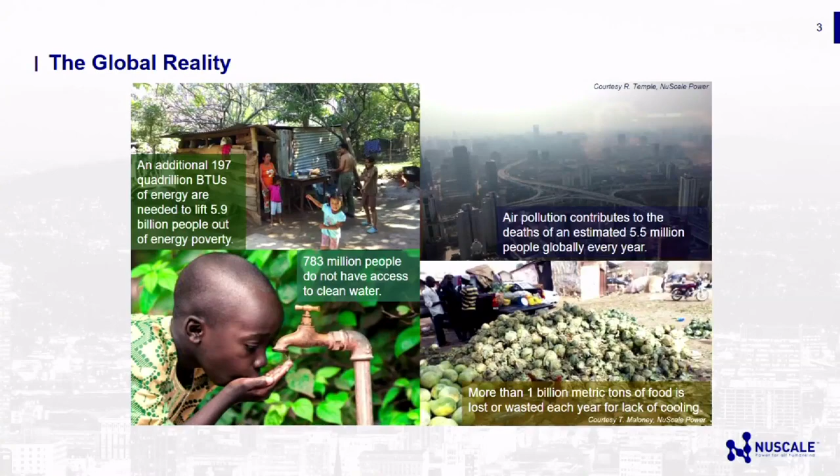And here's one I really wasn't aware of until we started researching it. About 1 billion metric tons of food is lost or wasted each year because they don't have the electricity to take it from the farm to the market. And so it gets spoiled. So that's the world we live in.

Now, it's not all doom and gloom, because if you look back in the 1960s, the poverty rate has been cut in half since 1960. So there is progress being made, but we have a real opportunity to make a change in the world. So the United Nations has their Millennium Development Goals, and they list them in terms of education, health, environment, sustainability, child mortality reduction.

And one of the conclusions from the United Nations was that without access to modern forms of energy, it's highly unlikely that any of these objectives could be met. So energy plays an important role in moving folks from poverty to a sustainable, healthy life.

So this is kind of a busy chart, and I brought this huge laser. Yeah, that's what I'm talking about. I got this great laser here so I can illustrate this. So if you look at the chart here, I was going to step out a little ways.

This vertical axis is called the Human Development Index. That index captures a couple of different factors: health, education, and income. So it's basically the quality of life on this vertical axis. Then on the horizontal axis, this is the total primary energy demand in gigajoules per year per person. This is how much energy is being consumed in these different countries, per year per person. Okay, this was the demand curve.

So what they found was that there's this correlation between human development and the amount of energy that you use. And it does make sense when you think about it. Right now the US is at 330 gigajoules per year per capita, per person, and the HDI is 0.94. Okay, so that gives you kind of a sense.

You can see on this little smaller chart here, here's the USA over here, and you can see these other countries all along this curve. And this 0.8 is kind of a transition where you'd like people to be above that number. So I started thinking, I wonder what the US was like 150 years ago. I wonder if this correlation is correct, and if it's truly time independent, which there's a lot of work that needs to be done to look at that.

Then I looked up the energy consumption rate back in the 1860s, and in the U.S. we were about 90 gigajoules per year per person. So using this curve, that would put us around 0.75, and 80% of that energy usage was burning wood. So in the 1860s, the primary source of energy was burning wood. 20% was coal, and there were really small fractions of petroleum just starting to be used and some natural gas. But the majority really was burning wood.

And so we went basically from this point all the way over here, and to me that was really encouraging. It took a long time. As the other forms of energy were being introduced, electricity in particular, the large use of coal, it did help move our country from one end of the curve to the other to give us a standard of living that we can enjoy today.

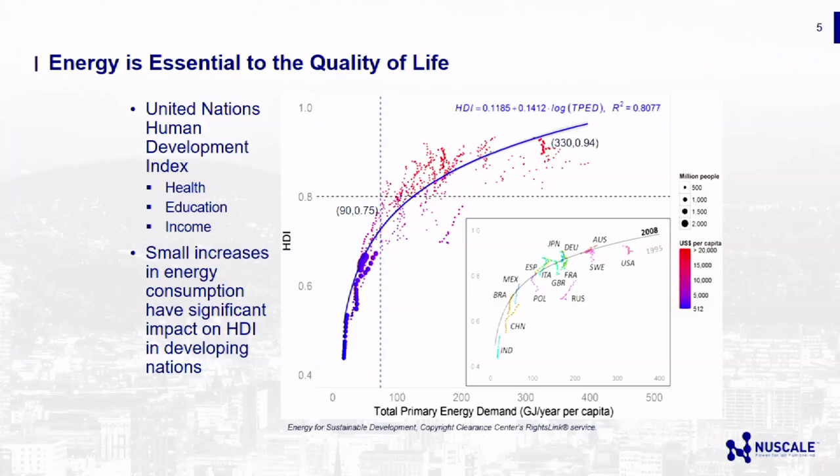It also tells me that if you look at this part of the curve, it's fairly steep. And so what that means to me is that small changes in energy per capita could really move this line up quicker. So developing nations, if you look at where we were back in the 1860s, that's equivalent to where Brazil and Mexico are today. If you look down here, this is India, China. So things are changing.

But small changes in energy could really have a big impact. And there's lots of reasons for that. It's kind of a multiplicative effect. You have energy availability, now all of a sudden you've got clean water, you have light, you have energy for your homes, you have more jobs, and it really accelerates very quickly on that end of the curve.

So this curve to me was very encouraging, but there's also the big challenge. How do we bring almost 6 billion people out of energy poverty in a carbon-constrained world? So sure, when you can use all the coal and wood that you want and emit as much CO2 as you want, you can move along that curve. But how do you do it if there's a carbon constraint? So that's kind of what I'll be focusing on now.

So innovation. OSU is really world-class in terms of its energy research. And it's really kind of an all-of-the-above strategy where we're looking at all different types of energy: wind, wave, and of course nuclear energy, solar cells with photovoltaics, biofuel production, low temperature combustion studies, nanofluids, you name it, the university is researching it.

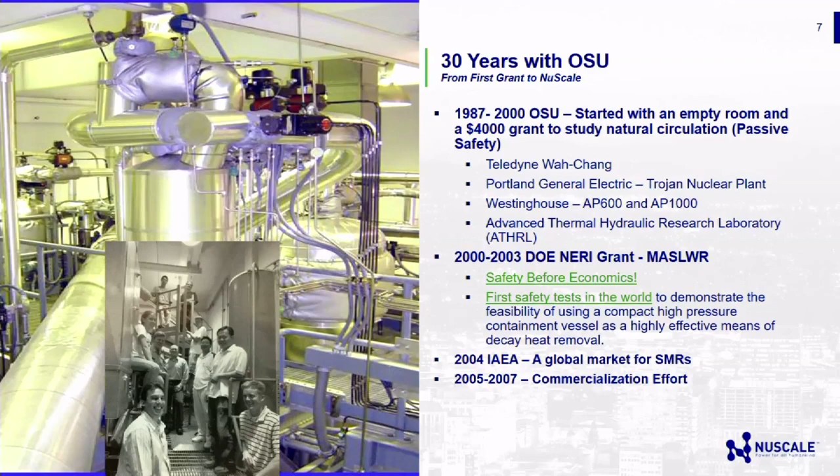In 2000, I had pretty much finished the work on AP600 and AP1000 with the help of my colleagues in the department. Got a grant from the Department of Energy. And it was called the Nuclear Energy Research Initiative. And they funded a project which we called the Multi-Application Small Light Water Reactor, MASLWR. Yeah, it doesn't roll off the tongue real easy. But the idea was that we would come up with a concept for a very small reactor that could be built in the factory, could be shipped to a location, and then it could be operated for 8 to 10 years, and then at the end of that time, you'd actually replace it with another one. So it's kind of like a battery concept.

And because of my background with the Nuclear Regulatory Commission, my perspective was always from safety. I had a safety mindset ingrained in me from the 10 years I worked for the Nuclear Regulatory Commission. So for us, it was safety before the economics. We didn't even look at the economics of this thing. We just said, let's run a test and see how safe it is. And so in 2003, we ran the first test in the world to demonstrate the feasibility of using a small reactor inside of a small containment immersed in water. And it was a spectacular success. So in 2003, that data was available, and it demonstrated a new level of safety that hadn't been seen before.

So when that was done, of course, what's typically done is that you finish your work on a project, you publish a paper, and then you go to the next project. So I was fortunate in 2004 to spend a year in Vienna with the IAEA, the International Atomic Energy Agency. So they work closely with the United Nations. And what I learned while I was there in talking to the delegates from the different member states was that there was a tremendous interest in small reactors. In particular, their concern was that, well, we need power, but we can't really afford the large 1,000-megawatt plants. They're very expensive. And also, we don't have the grid to support 1,000 megawatts. So they were looking for smaller scale power.

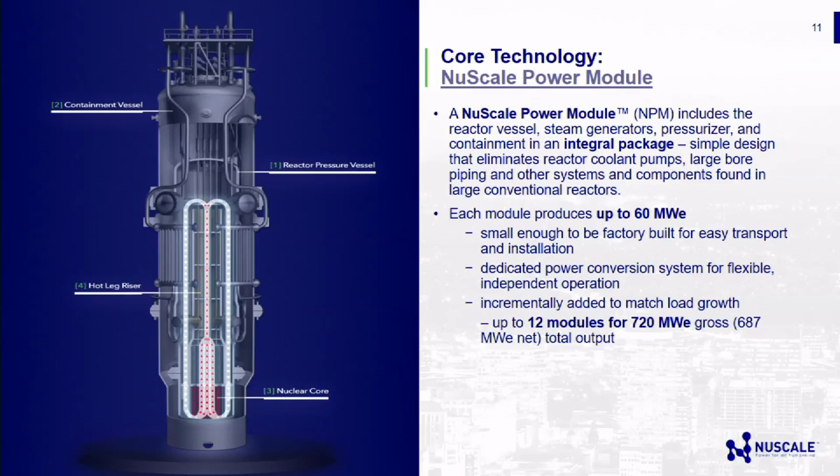Okay, so now you will all become nuclear engineers. So I'm going to talk a little bit about the technology, because I keep talking about these small modular reactors. It would be nice to know a little bit about what I mean by that. So what we're doing is we're commercializing SMRs, small modular reactors. And it's really an integral package which contains the reactor vessel, the containment, all submerged in a pool below ground. And that's kind of the whole technology.

Each module will produce about 60 megawatts electric. And our first plant, for the first customer, they're looking at anywhere between 10 and 12 modules, up to 720 megawatts electric. What they like about our technology is that it can add modules as modules are needed, so you don't have to fill out the entire plant up front, so it saves them in terms of cost. And that flexibility that it can actually fit on a retired coal-fired plant site in terms of the footprint.

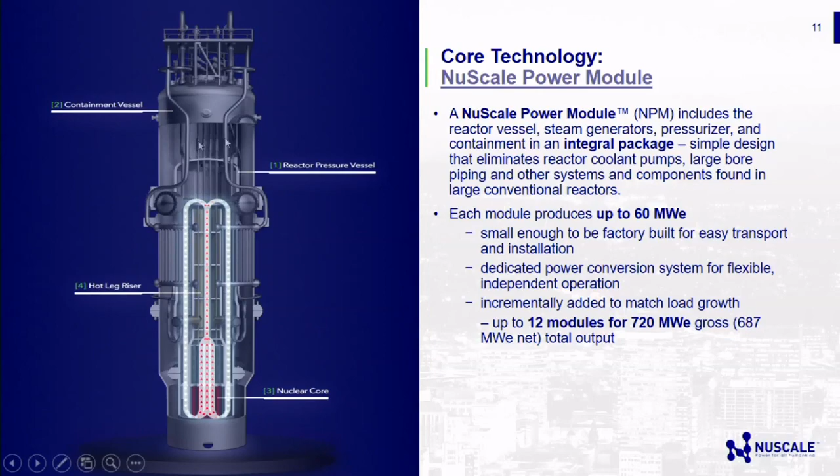So this is kind of a, let me see if I can do this here. Chief Technology Officer. Yes.

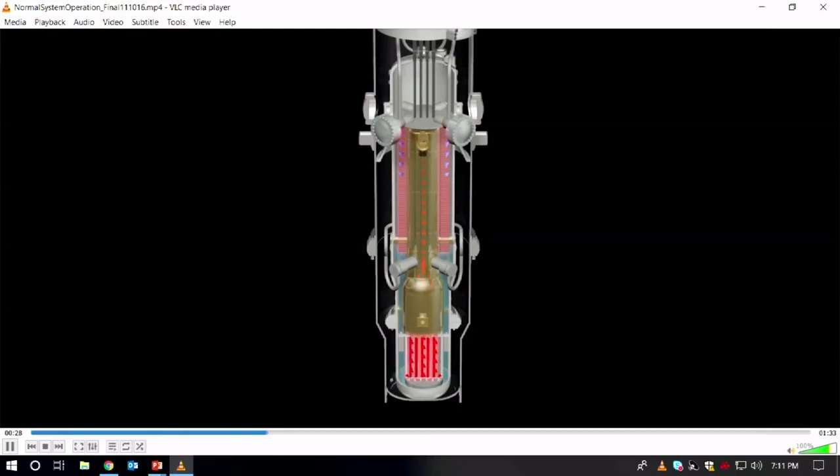So this is our reactor module. This is our core. That would be our nuclear fuel. It's about 6 feet tall, 7 feet tall, and so that fission reaction would occur to produce heat, and the hot water would rise because it's a lower density. And this over here are the steam generator tubes. It's like a helical coil steam generator. It's like 2 DNA intertwined.

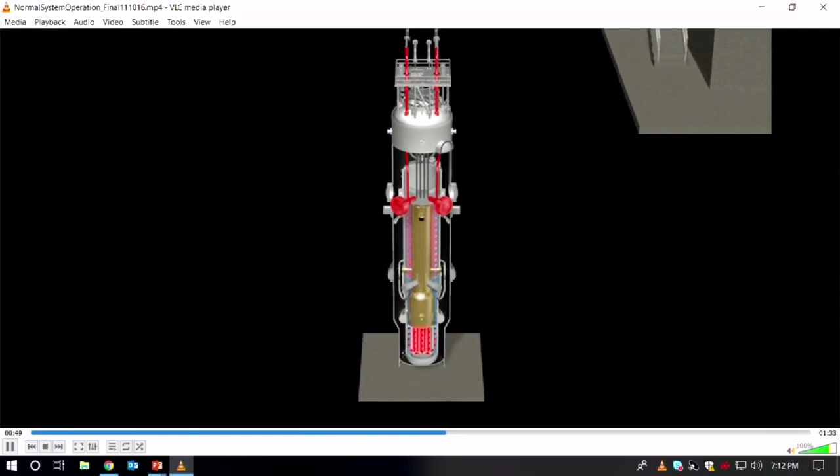And so you have cold water flowing inside the tubes, hot water flowing on the outside of the tubes, and that heat rejection then produces higher density fluid on top of lower density. You have an elevation difference, a density difference, and it just gives you a natural circulation flow. So this design doesn't require any pumps inside the reactor. So that was an innovation in and of itself.

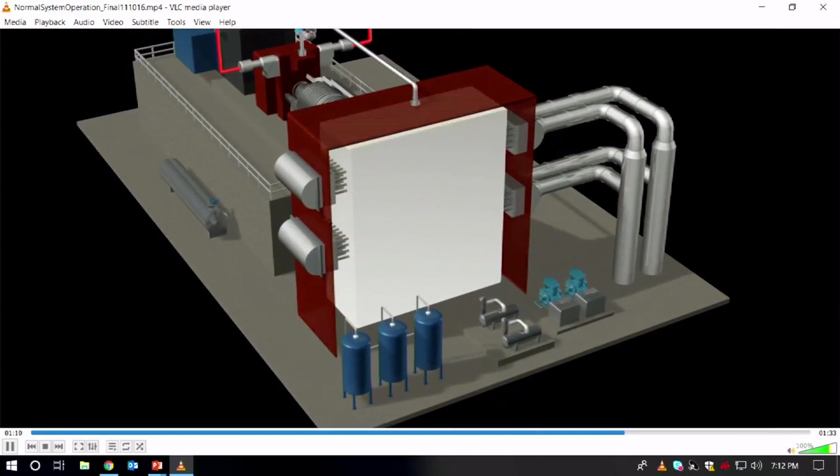On the secondary side, you have feed water, steam coming out, goes to a skid-mounted turbine generator set. So that's a conventional fossil fuel 60 megawatt turbine generator set. You can buy it as a package. You can deliver it, you can replace them very easily, and they're relatively low cost. This is the condenser box. So steam comes in, it goes through the turbine. As it comes out, the spent steam then gets condensed in the box.

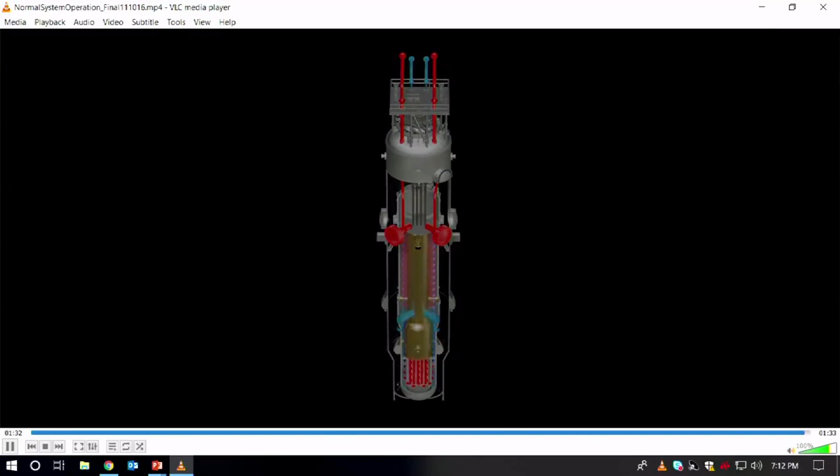And then now here you do have pumps, which goes to the inside of the tubes. So it's a very simple system, and each module has its own power unit. Each module has its own turbine generator set, has its own generator, and of course you can add these things as units. So you can start off with 1 or 2 units, producing 120 megawatts, and then later on you

can pick up the phone and you can call me. Day or night, you can call me, and I'll get you another module right away. But they can order these modules as modules are needed. So it really is a different model for the deployment of nuclear. It's an installation as opposed to construction.

So this is a little bit of the overview. So this is the module. That's all factory built. And that's the whole idea, especially we wanted to have this containment factory built. So instead of the big concrete dome that you're accustomed to seeing in nuclear power plants, what we've gone to is a small steel containment shell that you make in a factory. And there's some real safety advantages to doing that.

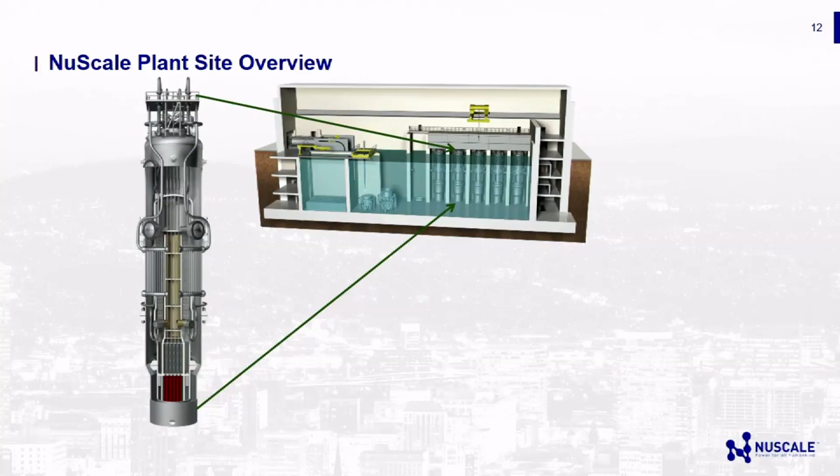So this module then sits inside of a reactor building. This is the reactor building. This is the ground level here, and this is a pool. So each module sits in its own bay in a pool. So this shows 5 modules on one side. There'll be 6 modules when it's filled out. And then there'll be 6 modules on the other side for a 12-module plant. So this is for the first customer. We're looking at single modules, 2 modules, 4 packs, a whole range of different combinations.

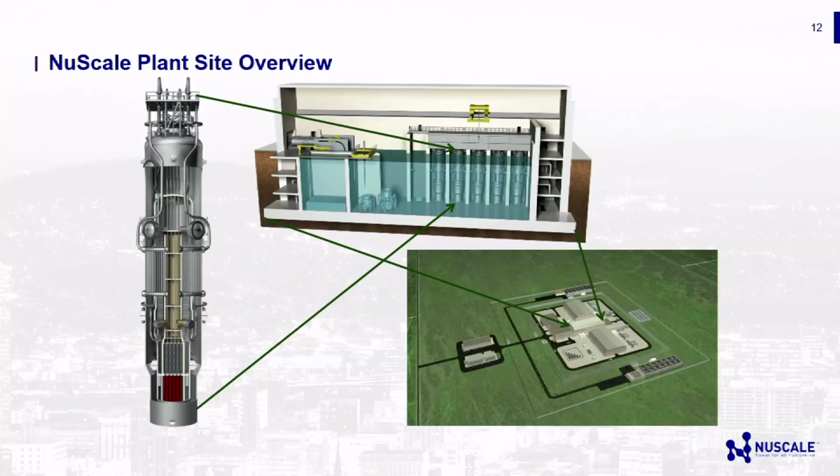Then this reactor building, which is a seismic category 1 building, sits over here. That's in the middle. These 2 wings here, that's where we house the turbine generator sets. So there'll be 6 on either side. The footprint is about 34 acres inside the fence, so it's relatively compact. This system could either use water cooling for the condensers or air cooling, and I'll talk more about that in a minute. It really does represent a new approach to the construction and operation of nuclear power plants.

The idea that you can make these in a factory, then you can ship them by truck, rail, or barge to the site and install them. It reduces the construction time enormously. So you can imagine that you're doing all your civil construction on site, and while that's going on in parallel, you're doing all your fabrication of the modules off-site in a very controlled environment. And then it cuts the construction down from 5 to 6 years down to 3 years. So it's a significant savings in cost just because of this different approach to manufacturing.

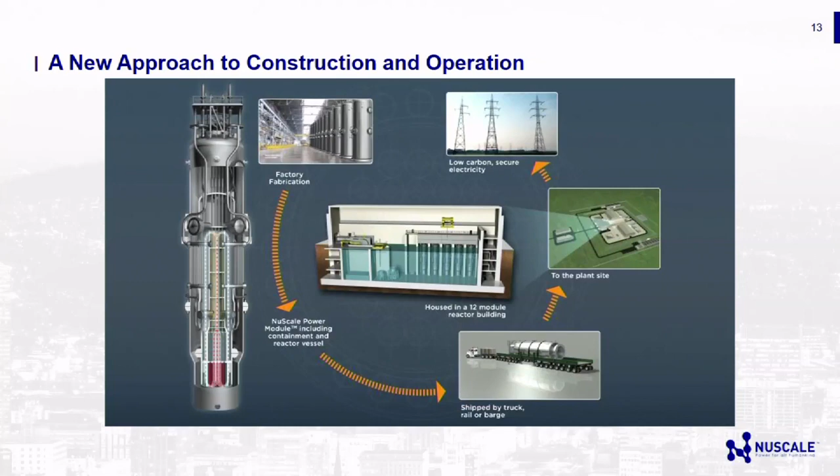Safety. So one of the things we knew about early on was that this design would be very, very safe. And the big reason for it is that we're not using any active systems to provide safety of the plant. So we're using conduction through steel, we're using natural convection of the fluid, we're using gravity to drive the flows. And so these were natural processes that did not require AC power or DC power really for safety. Because the modules sit below ground, we're seeing enormous advances in seismic capability. This is underground and in a pool.

So one of the innovations from our company was that some of the codes that were being used in the industry, there's one called SASSI. I think Dean Ashford is familiar with that. I'm not sure when it was developed, maybe in the 60s, 70s, early on. Well, our folks got a hold and created state-of-the-art codes, which model not only the soil interaction with the building, but also the motion of the water and interactions with the modules. And we find that we have a significant advantage in robustness in terms of our seismic capability. So it's a big advancement, but part of it was because of the innovations that happened within the company.

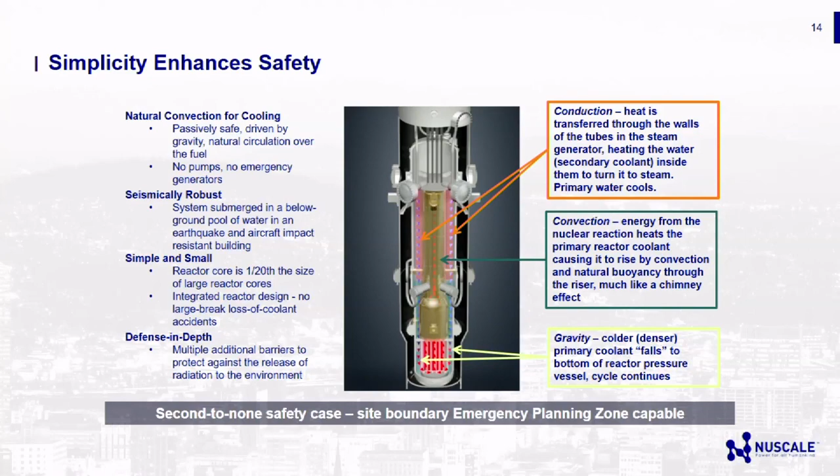This is kind of an example of the level of safety that we can achieve with this design. So for this design, because it's a small core, about 200 megawatts thermal is the core, what happens is if you lose all your AC and DC power, you have a big earthquake and you lose the grid, so now you have no AC connection to the grid. And let's say they can't restore the grid, so eventually your DC power disappears, right?

In this design, we don't require any AC or DC power. In fact, this reactor will shut itself down without any AC or DC power, without any operator action, without any computer action, and cool itself for an indefinite period of time without adding water. So it transitions from a water-cooled system to an air-cooled system without any operator action.

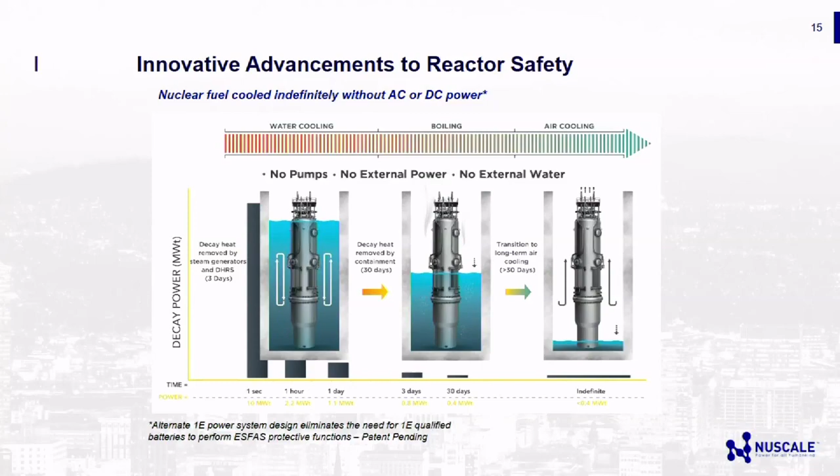So the way it works is that you have this big containment shell sitting in the pool. We have safety valves on this system, and because there's so few of them, basically 5 on the reactor vessel, during normal operation they're held shut with power. You lose power, they spring open, and that's it. That's all you have to do, is let those valves spring open, just a mechanical spring.

And at that point, you're venting steam into the shell, and that steam inside the shell is condensing. The heat's being conducted through the steel wall and being deposited right into the fluid directly. And it'll do that continuously forever without ever uncovering the core. So in 1 second, the control rods drop because they're held up by electromagnets. They fall, they shut down the reaction, but you have to remove the decay heat.

And so in a day, you go from about 10 megawatts or so to about 1 megawatt. In 3 days, you're down to about 800 kilowatts. If you didn't add water or you didn't cool the pool, after 30 days, you'd be down to 400 kilowatts. And you have so much surface area that just the motion of air against the shell is sufficient to remove all the decay heat. So we move from a water-cooled system to a boiling system, the air-cooled system, without any operator action.

That has some really interesting consequences. So recently, the NRC actually approved our design, and we're the only design that's ever been approved for this feature. If we apply our safety method for our design, the NRC agrees that we do not need what's called 1E safety power. They're basically acknowledging that this design doesn't really require power. They issued a safety evaluation report on our methodology and indicated that indeed we don't need this classification 1E safety power.

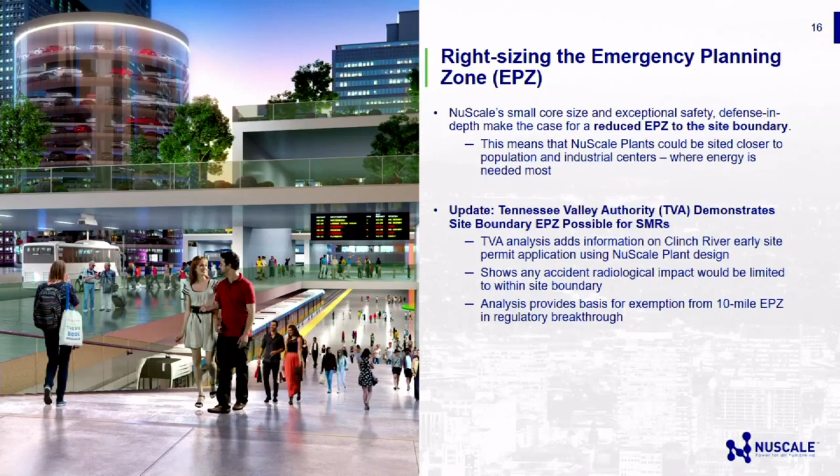You all should be like clapping. I'm just trying to keep you awake.

So if you've ever worked with a regulatory agency, they don't take you just by your word. You have to demonstrate everything. You have to test everything. So we're somewhere between $80 and $100 million in testing that has been done to validate our different components. So our fuel bundles have been tested. They've been built, tested, seismically shaken, and a whole range of testing that had to be done.

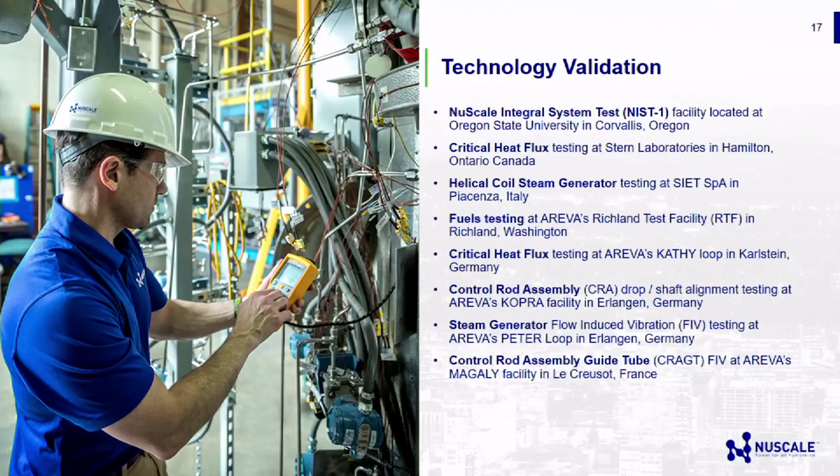We did what's called critical heat flux tests. Those tests look at what's the maximum heat that can come out of your cladding in a safe manner, so we know the limits of our fuel. We just completed our control rod assembly drop test. And what we did was we just picked the best testing agencies around the world who we were working with on specific things. So like the helical coil steam generator, that's a big test. That was a full-scale test that we ran in Piacenza, Italy.

So my wife and I got to visit. They're located just south of Milan. What? We went to the test facility.

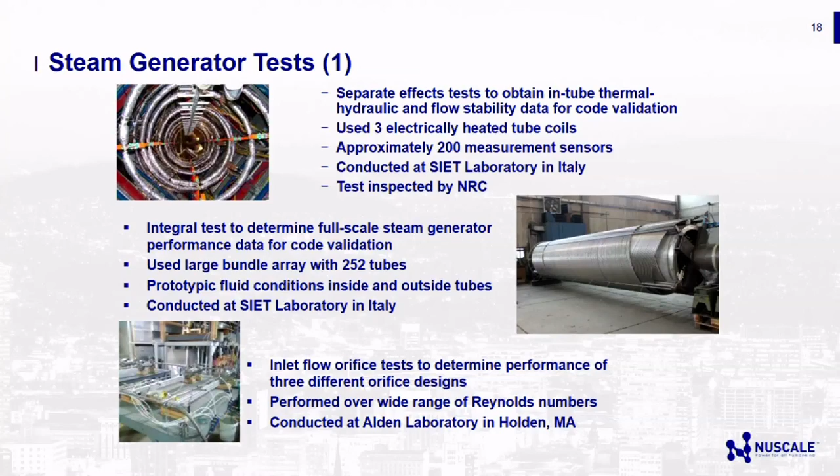So that was a full-scale test, and we've got additional tests being performed now. Flow-induced vibration test. We've done inlet flow orifice tests for our steam generators. So we're building the hardware at full scale and testing these things. Tube inspection testing that has been completed, looking at how do you look for cracks inside tubes. So we actually came up with a patent based on that work.

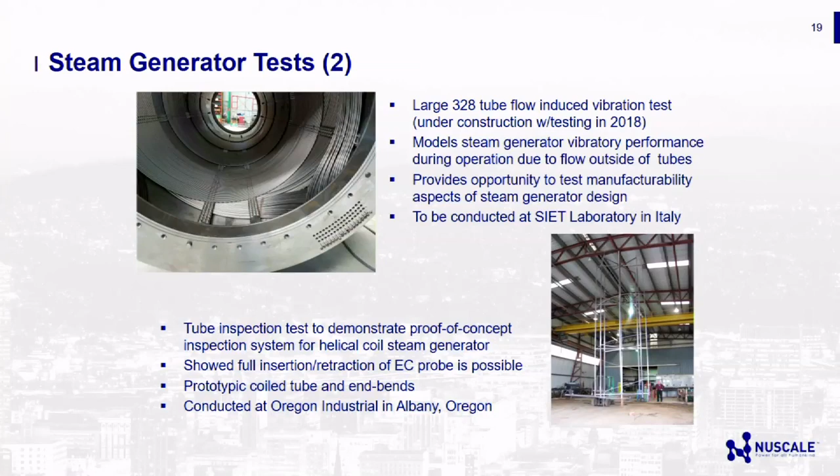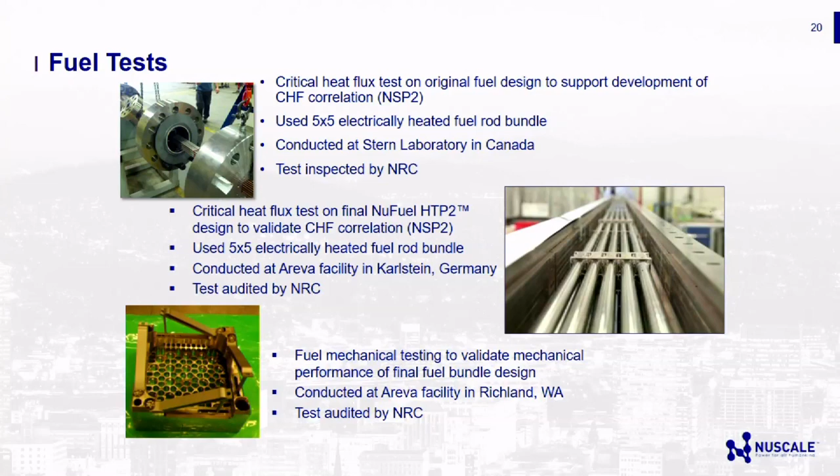Fuel tests I mentioned before. So those are actual fuel bundles that are being tested. These are electrically heated, but they take them to very, very high heat fluxes, well beyond what you expect to see in the plant.

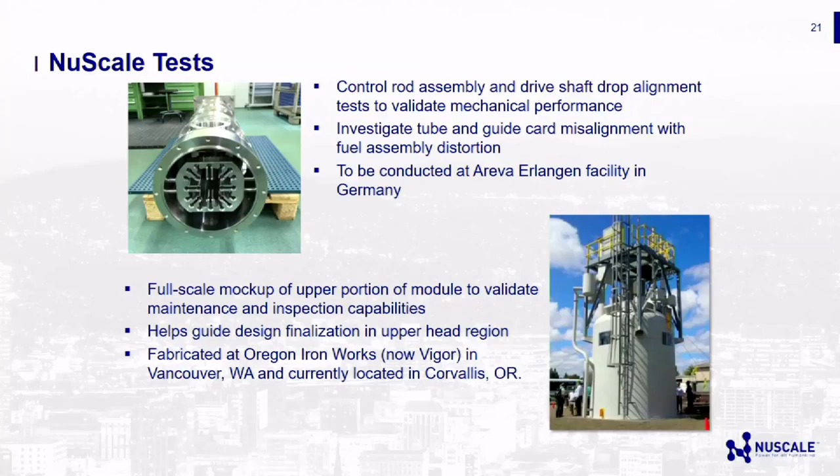And we did that so that we can plan our in-service inspection and maintenance work. So it's great because the engineers will crawl all inside there, and they'll see if they can actually do the procedures. And where they find a problem, they'll identify that, and we'll change the routing of piping and stuff inside the design. So it's a really good tool in terms of assessing our maintenance program.

And of course, our real workhorse facility has been the NuScale Integral System Test Facility right here at Oregon State. It's located at the Radiation Center.

Somebody wanted to clap.

That's been a great facility. That's an integral test, and the reason that's been so important is because we're looking at all the phenomena on an integral basis. We're looking at how the reactor interacts with the containment, how the containment interacts with the pool, and we have to model that with our computer codes. So what that does for us then is it provides a reality check for our safety analysis computer codes.

It also provides an enormous amount of data which is provided to the regulator so they can assess their own codes, they can assess the data and their codes independently. So that's been a great facility for us, and we continue to operate it. We just are now doing another, I guess it's going to be NIST 2, another upgrade to that facility to reflect the current design.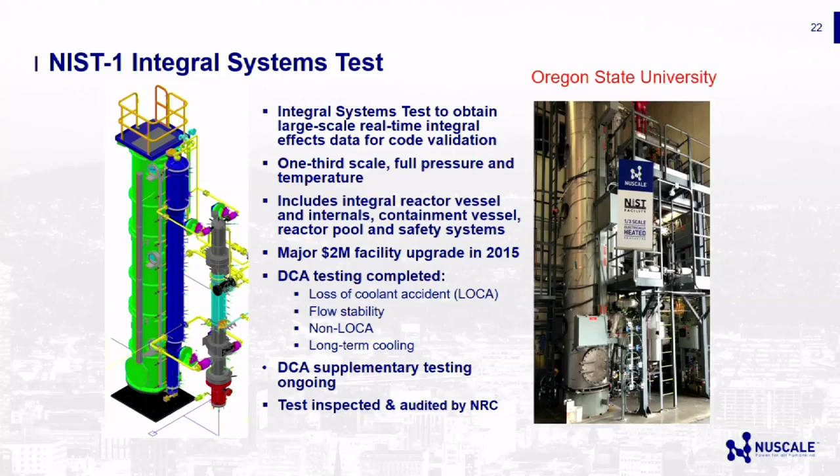This was a big one. The integrated system validation, and that's now completed. We had to demonstrate that we can control 12 reactors from a single control room, and we had to do it safely, and this was a real important test for that. So this is a performance-based evaluation of our hardware, our software, and the personnel.

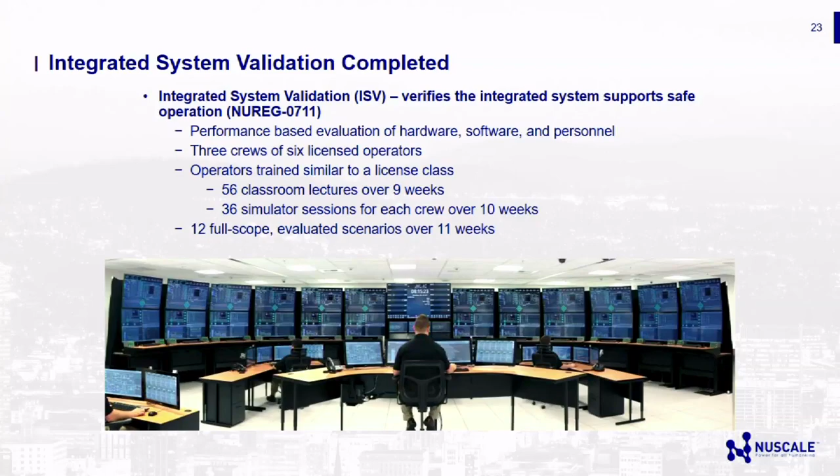So we actually hired about 22 reactor operators. So there was one group that had a lot of experience in the current fleet, operating reactors. Another group which didn't have a whole lot of experience. And then a third group which were just basically students who had just graduated from university. We mixed and matched those and created 3 crews of 6 licensed operators, and we put them through the training. So they were trained just like they would for the real plant.

They received 56 classroom lectures over 9 weeks. There were 36 simulator sessions for each crew over 10 weeks. And at the end of that, they had to perform 12 what are called full scope scenarios. And so this is where we get to throw everything but the kitchen sink, maybe sometimes kitchen sink, at them, and we would see how they respond.

And so at this, we're doing human factors engineering studies and human system interface studies as this is all being done. We're collecting all that data, and then for 2 weeks of that evaluation, the NRC inspectors are in the room, and they're watching these operators go through these different scenarios. And there'll be crew reductions. We'll get down to 3 operators with multiple issues, and they have to be able to handle that.

They did amazingly well. This system and this design is really intuitive. So they learned it, and they were able to execute this really flawlessly. The NRC was very impressed by our conduct of operations. It's really impressive to see when these folks are in the room, these young men and ladies, just eating this stuff up.

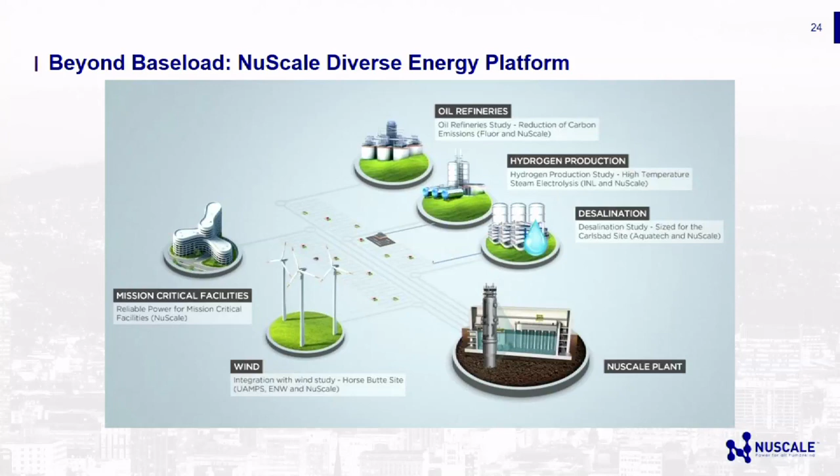I'll talk more about wind and renewables in just a moment because it holds a special place in my heart. And I'll talk about mission critical facilities also. So we've looked at different applications and we find that there's really opportunities to do this. So this is the clean water. So we wrote a paper which got published at a conference in France. And it was really interesting.

We raised the question, can nuclear and renewable be friends? We really want to be friends. For some reason, not everyone, and certainly not in the university. I think at OSU, folks work very well collaboratively. But in other places, nuclear and renewables don't seem to get along. So I said, we need to be friends. So in our design, we developed what we call load following.

So one of the challenges with the penetration of renewables like wind and solar is that they fluctuate. You know, the sun doesn't shine all day and the wind doesn't blow all the time. So you have fluctuations. And if you get to a certain penetration level with renewables, you lose grid stability. So that's a problem. So when we talk to our utilities every 6 months, they say we need a design that's flexible enough to do some load following. So we came up with load following.

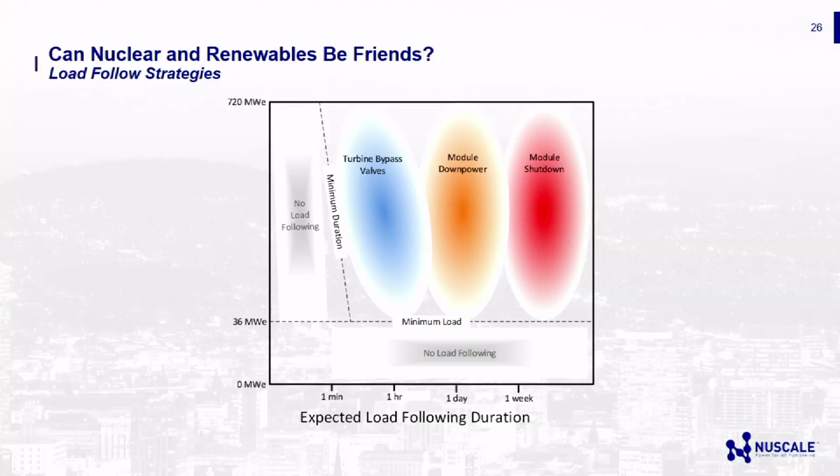Our central control rods and our design is flexible enough to where we can raise and lower power just with those control rods. And we have a really good maneuverability, which was surprising because it's a natural circulation system. We thought we wouldn't have this level of maneuverability, but it works really well. So that's kind of an intermediate. Over time, we can raise and lower the power of one or more reactors and do that load following.

The third is module shutdown. So basically, we can say we have 12 modules. You're going to use water from the dam for the next two months. We can actually shut down a module for one or two months, depending on what the customer wants to do. So we've added a lot of flexibility to our design, which we previously haven't done with nuclear, and our core is designed to do this in order to be a good partner with renewables. So we would like to be friends with renewables.

This is a study, and so our first customer, UAMPS, like most of the utilities we work with, they all have wind power or solar power. We did do a study. Right now they have about 57, almost 60 megawatts, and this is wind power, and it occupies about 17,000 acres. So it's a really big wind farm. So they put a lot of space between these.

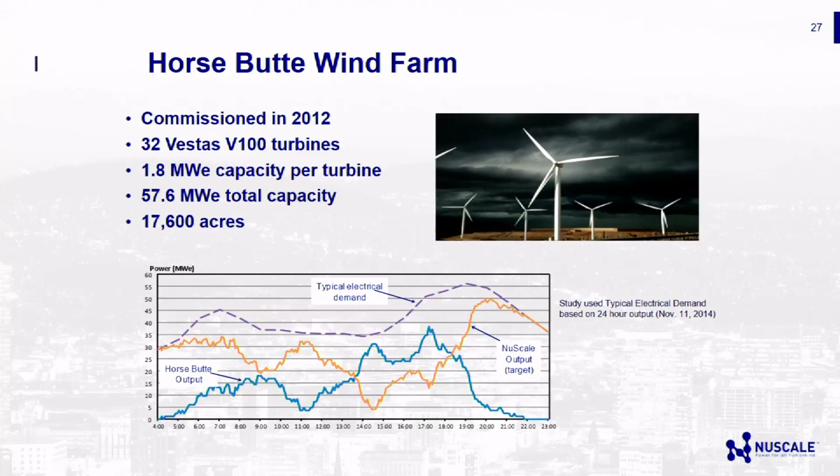And this just shows a typical demand curve. This shows the wind farm output. And this shows what we would have to do in order to keep that up. One of the studies I'd like to pursue now is that we can use some of the power shaping to reduce the amount of steam that we dump to the condenser, to reduce the energy losses there. So I'm looking for some really clever AI people, artificial intelligence people, to work with us because we think there's some opportunity to do that, because weather is really hard to predict, but with AI, they're doing some amazing things.

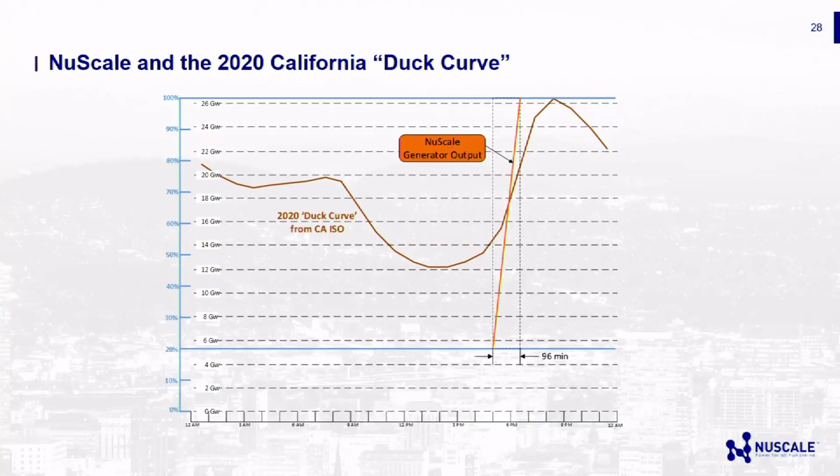The other thing we looked at is the solar power, and this is the so-called duck curve. It has nothing to do with the ducks, right? So it's just called the duck curve. But this is what's being predicted for 2020 for California. So this is the ISO curve. And what it shows is that at the end of the day, of course, the sun's going down, so you're losing power. But people are going home, they're turning on their TVs, their plasma TVs, their fancy computer things. They're using a lot of power in the evenings, right? They're cooking and all that stuff. So the power demand goes way up.

Well, we designed our system so that we can ramp up. We can go from 20% power to full power within 96 minutes and actually address the duck curve. This is getting a lot of attention right now in what's called the energy imbalance market, which I'm not real familiar with, but it sounds like this is a real opportunity for us or for our customers to be part of that EIM.

Another aspect of our design, we finished about three years of additional studies. So the NuScale Diverse Energy Platform studies, looking at different applications, was about three years worth of work. This is another three years that we worked on plant resiliency. So again, these are different studies that we've done and published. My vision for NuScale's vision for nuclear is to become first responder power.

Okay, first responder power. So right now in the nuclear industry, all nuclear power plants are required to have two independent connections to the grid. And the reason they have those connections is to assure that you always have power to your safety systems. And they have a lot of redundancy in terms of backup diesels and things like that. Hurricane comes along, knocks out the grid, and so now you're relying just on diesels. Well, in our design, we don't rely on any AC or DC power, so we don't need the grid. And so I'm moving us to get approval to be an off-grid operator.

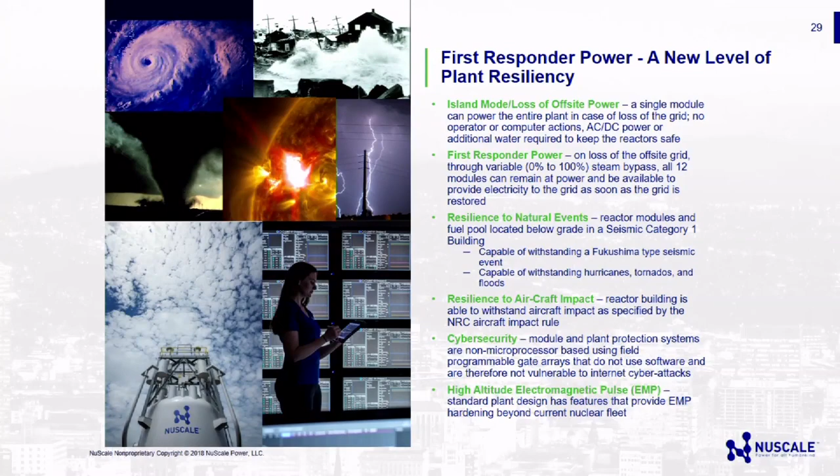In terms of seismic, we could withstand Fukushima-type seismic events. And a big part of it is because most of the building's underground. We don't have the large lever arms up high. We can withstand hurricanes, tornadoes, floods, so it is very resilient. This is a post 9/11 design. We had to design the building to be aircraft resistant. So aircraft impacts, we designed for that.

Cybersecurity is another big one. We went to a very different design for our module protection system and plant protection system. We use what's called field programmable gate arrays. It's kind of like a hardwired package, so you can't change that programming. So even if you were connected to the internet and you had a cyber attack, that program can't be changed externally. So we made a big step forward in terms of cybersecurity.

And then lastly, and most recently, we completed what we called our electromagnetic pulse studies. I was surprised. When the experts gave us the results, they were very impressed with our design, and they said, you know, it's a really nice document. I mean, they did a lot of work. And they said, this is the state of the art. This type of study has not been done for the power industry in a long, long time.

And what you've done is something much more advanced and much more detailed than's been done before. So they said the rest of the power industry would really love to get your results. So we did get a request from the Department of Defense and from the Department of Energy to share those proprietary results. And we're working now with some of our OSU colleagues, the Palmers, to put together a non-proprietary paper. And I think that's going to be submitted in November in Orlando.

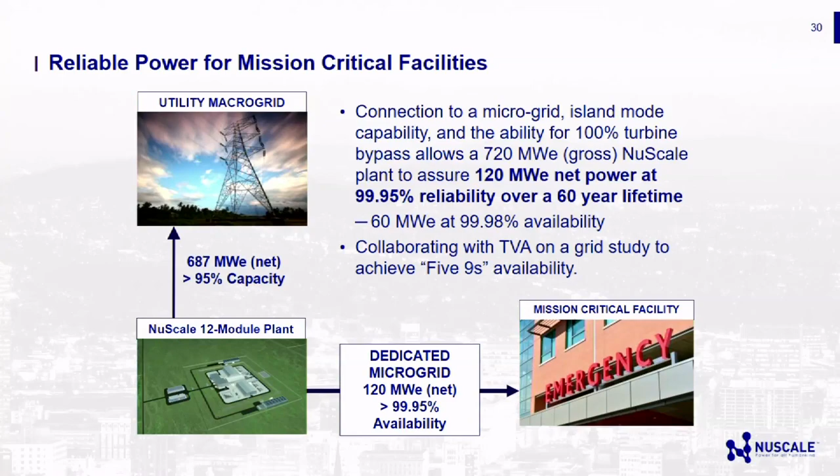We have a 12-module plant, and each one of these units is a separate power unit. So if you think about what's done in the computer industry to have reliable storage memory, you have what's called a redundant array of independent disks, right? So what we have is a redundant array of independent reactors. So when you do the studies, we can provide greater than 95% capacity to the grid at any time.

But if you ask the question, well, if you have a mission-critical facility on a microgrid, and you have a NuScale plant connected to that microgrid, and you don't need 720 megawatts, you only need 60 to 120 megawatts. So it's a subset. You only need 2 out of the 12 or 1 out of the 12 modules to be available at any one time.

What you find is that for a mission-critical facility like a hospital, data center, you name it, things that have to have power 24 hours a day, 7 days a week, we can offer them 99.95% availability for the 60-year life of the plant. So that's a huge, huge improvement in terms of availability for a microgrid. That doesn't include the reliability of the microgrid. It assumes that the microgrid is going to survive these different events. At 60 megawatts, it's 99.98%.

So our utilities who we're working with, TVA, said, oh, that's nice, okay, but we want 5 nines. Okay, 5 nines. But there's a trick to that. They're saying, what if we took a NuScale plant and replaced some of our coal-fired plants with a NuScale plant? So now you're adding to the grid a higher reliability plant, and you can take advantage of the fact that you can have multiple power units providing power to that mission-critical facility. That report will be published pretty soon, but I'll tell you, we're just at the 5 nines. So it's pretty impressive. We're excited.

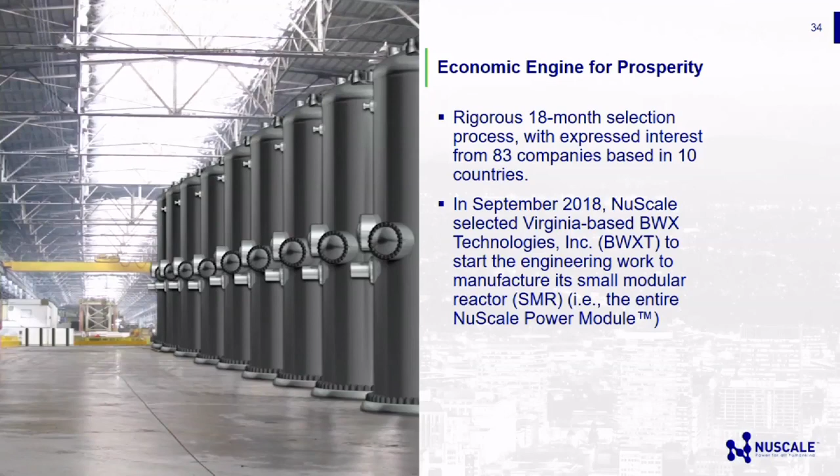We have selected our manufacturer, BWXT. They're a Virginia-based group. They're very capable. There are a lot of modules lining up to be shipped out. We went through an 18-month process. We received interest from 83 companies from 10 countries. People know about NuScale, and they want to be part of that economic engine.

The energy that powers us has changed over time. Innovation, ingenuity, and curiosity transform how we fuel our lives, allowing us to do more, to be more. Today, reliable energy enables many to live the human experience to the fullest. But not all have access. We all deserve to experience what it means to truly be human. And yesterday's energy has done all it could.

Once more, innovation, ingenuity, and curiosity conspire to break through. It's time we outgrow what we think are our limits, to open our eyes to a better path toward the energy we need. A better kind of energy for humankind. Smarter, cleaner, safer, and cost competitive. It starts by reimagining what's capable and creating energy that can take us further. It starts with us, for all of us. NuScale, power for all humankind.

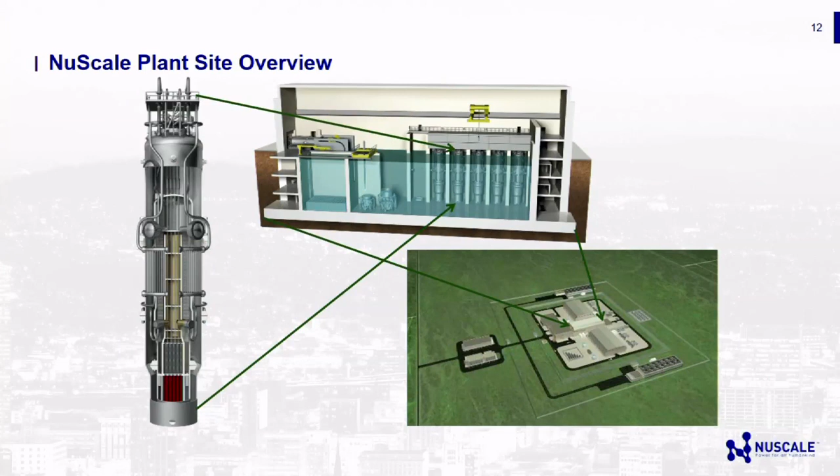At the end of that time period, about 95% of the energy content is still in that fuel. Oh, that got quiet. But 95% of the energy content is still in that fuel. So that's why many countries reprocess or recycle that. And so that's a potential use for that fuel. But I did want to show what we're doing with our fuel for our site. And I mentioned this is 34 acres. You see this little corner here?

That little corner is where we would have our dry cask storage, which is the best practice today for nuclear waste. That little area houses all of the spent fuel from all 12 reactors for 60 years. It's all in that little space. In our design, we've really worked very hard to keep the volume down of the fuel, but even beyond that, if that fuel is available for reprocessing, you could reduce that volume significantly further. So we're not talking about a large volume of waste for a 12-module plant. So at least that gives you kind of a perspective.

Where we are now is the question, as a country, we need to make a decision. The technology exists to reprocess spent fuel. Other countries are doing it. It's something that we could do. Uranium, however, is very inexpensive, and so to reprocess, I think there's going to be some economic case that's made for that. Okay? Yes, next question.

The waste question was already asked and answered, so thank you. So my next question is, you guys spent about $750 million and you're going up to spend $1.4 billion. You told us how good all this is, but you haven't told us how to invest.

Oh. Well, let me get my... Thanks, what a wonderful question. Yeah, we're looking, I can't say a whole lot, but we're looking for that great day, you know, when it's open and available for people to invest. Any more questions? Oh, yeah.